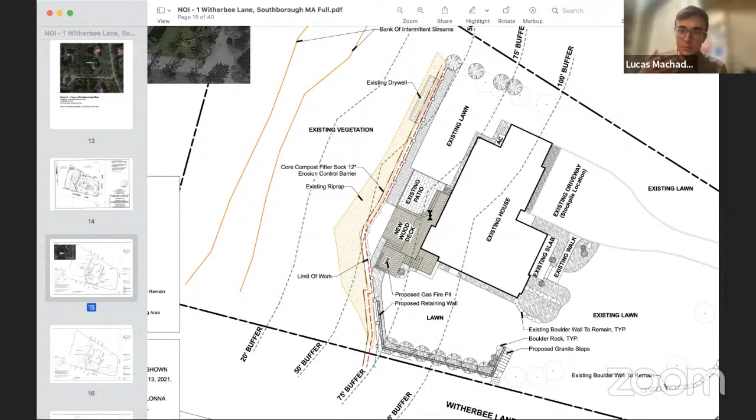Hopefully you can see the proportions okay on the screen here. One thing to note about the fence and the deck: currently, let's look at the demolition plan. You can see this is the current outline of the deck, which is a little ways, maybe 10-15 feet, from the fence. In the new deck design, there's actually going to be a gate. The fence will end here at the deck and start up again at the other corner of the deck, so the deck becomes the new threshold of the fence. In that sense, it's pulling back away from the wetland area, which is nice. So instead of the fence being set off from the deck, it's now all part of it, which gives a little more space over toward that woodland area.

I think the previous developers did a really good job making a very distinct threshold between the wetland resource protected zone and the suburban lawn zone with this existing riprap that you see here. This helps secure the aggressive slope that comes down toward the wetland area, so we're not proposing to do any work beyond that riprap or that slope.

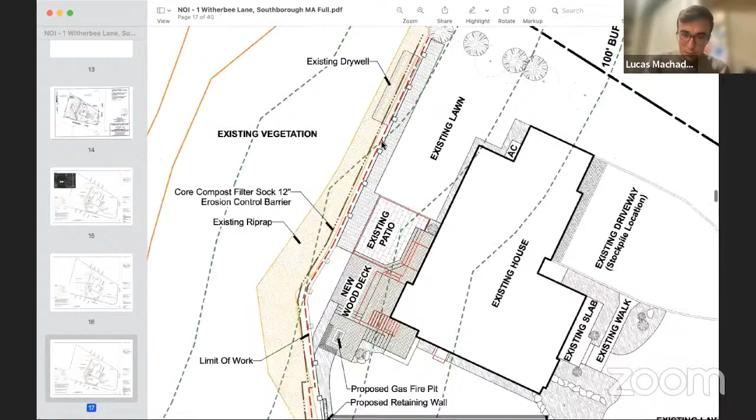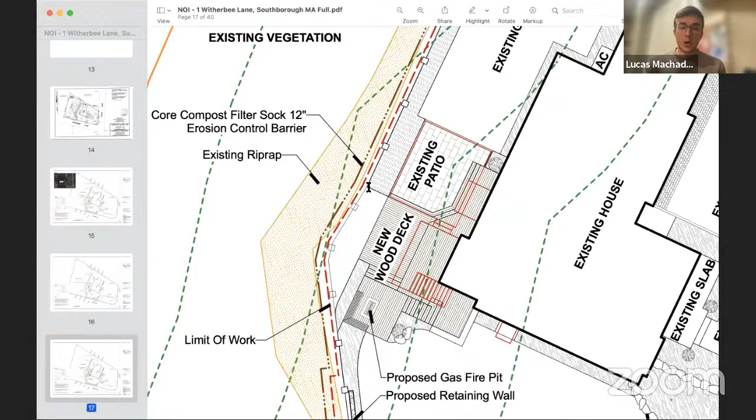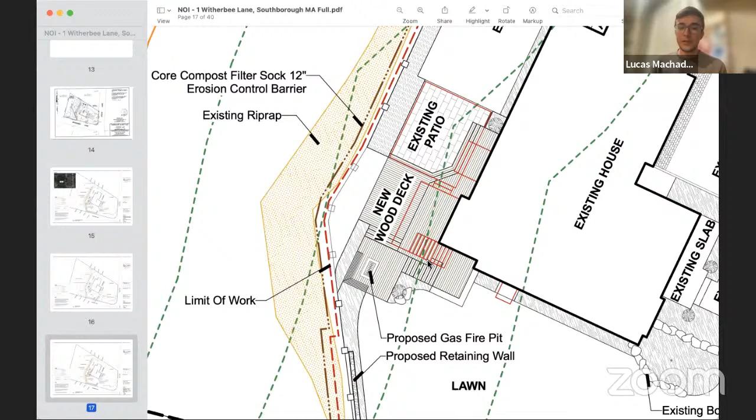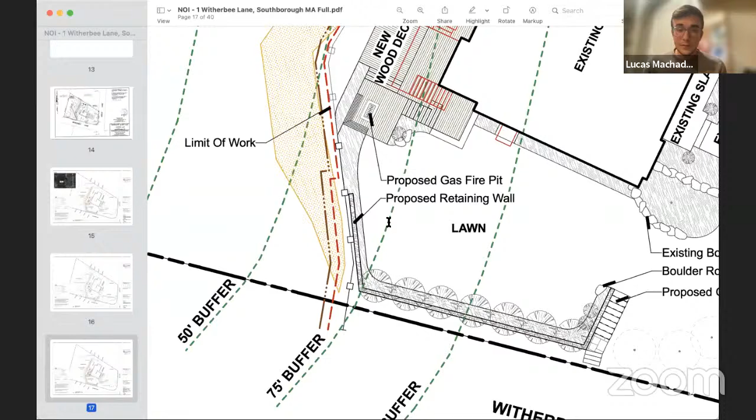That's why there's only about 3 feet to walk past the existing fence here anyway, and that's why we have the limit of work about 3 feet off there. Our erosion control barrier is 3 feet off, and the limit of work is 1 foot off the fence. Most of the work will be done closer to the house because of the nature of the deck, but because we'll be replacing the fence using the existing holes from the previous fence, we put the limit of work at 1 foot off, except down here where the retaining wall gets a little closer to that sloped area, where we're giving a bit more space, although we intend to do most of the work from this side in terms of excavation, footing, and building the actual wall. So we don't anticipate much disturbance on this side, but we did bump it out a little. Other than that, everything is kept from that natural barrier already there with the riprap and the slope.

There is a mitigation component to this, where we've decided to incorporate some native plantings into the proposed landscape beds. That's something we're really excited to do as part of this project, to amp up the naturalization and all the benefits that come with planting native species in their native area.

So I think that pretty much sums up the project, but please let me know if you have any questions. Thank you.

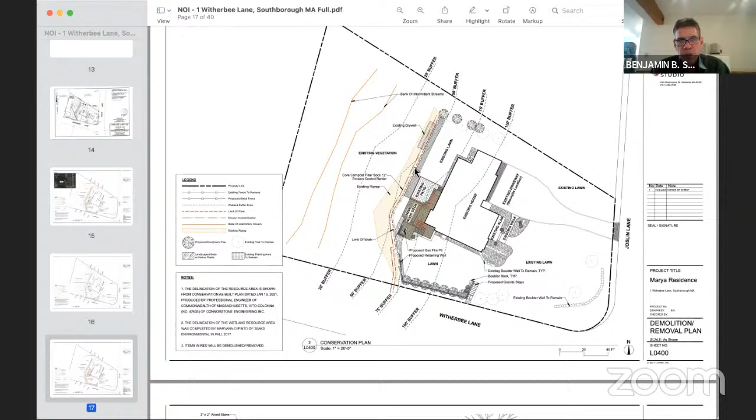So I understand that the previous filing was recent enough that the review done by Lucas Environmental of the resource areas gave Melissa plenty of comfort that it wasn't necessary to go back and reconfirm these delineations. So we don't have a review from Lucas; we have a review from Melissa, which reflects the fact that you worked with her in preparing the filing. It sounds like, Melissa, you don't really have any concerns, that it's all been addressed as part of the filing.

Yep, and I did provide you guys with some pictures too, if you want to take a look at that steep slope. I outlined where the deck would be, because they nicely staked it out and sprayed it for me.

So I just made them a little bit clearer on the photos, so you can tell what he was talking about with that break of the fence. It'll be very clear that you can't encroach back in that spot. I think that's a great idea to have that stopped. Yeah, I had nothing else.

All the yard debris that was there, that me and Matt had noticed last year, has still been removed and nothing further. So happy to report the all clear on that one.

Okay, and the lawn area is not growing as part of this, is that correct? There's no clearing taking place to enlarge the lawn or to install the deck. It's all within previously cleared lawn area. That's correct. Any questions or comments from the commission?

Let's see if there's anyone here tonight from the public who wishes to ask a question or offer a comment. Please use the raise hand function on Zoom and we'll promote you up so that you can do that. Not seeing anyone. All right.

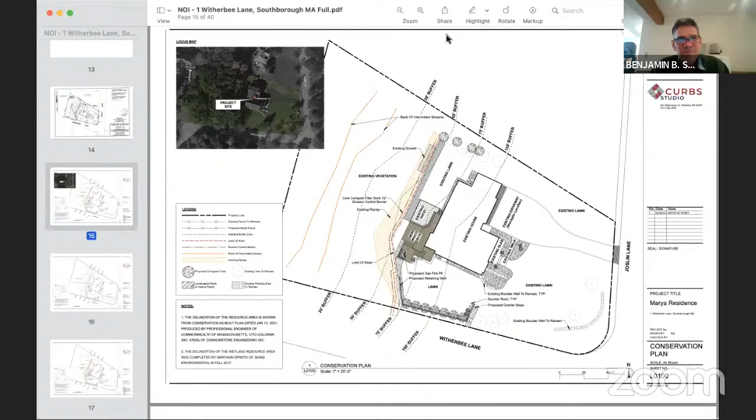All right, no, thank you guys. And I don't know how often you hear this, but I've gone through this process in several towns, and Melissa has made this such a pleasant and smooth experience. I'm so grateful, and hopefully look forward to doing more work with you guys in the future. You have a great operation for this. So thank you for the time again. Thank you, have a good night. And you put together a good application, so it always helps. Appreciate that. All right, bye.

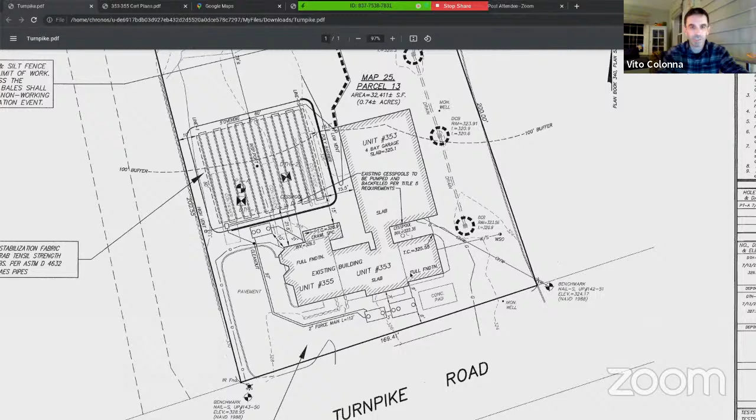So this is the site plan itself. Right now there's a granite shop in there and a fence contractor, and then also a residential unit on that property. They have an existing septic system, which includes a cesspool right in the back here. There's also a second cesspool kind of in the nook of this building right in here. They're both in failure. This one in the back is actually in worse condition.

The top collapsed a couple weeks ago. During certain times of heavy flow, it does leak out onto the surface of the gravel yard back here. So that one's really the urgent one to fix. This one is in failure, but it's not in any urgent need.

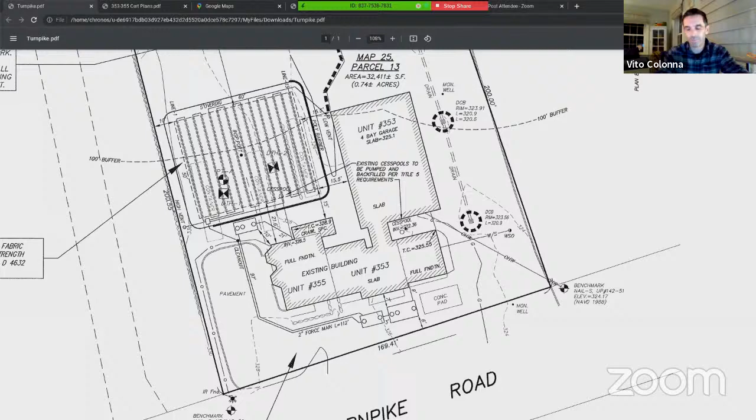There are wetland resources to the back of the site. There is an intermittent stream that runs right through here that leads down to a BVW that eventually goes on to a larger BVW down gradient from us. We weren't able to gain permission to enter the property, so this is shown based on observations from the boundary line. I do have, just so you can see it, luckily the Google truck went into the site.

So the plan was essentially to replace the septic system in the back here. The perc rates were very slow, we had a 60-minute rate, which is the slowest you can use. So the system is very large, and we really didn't have much option to fit it anywhere else on the site. We couldn't fit it up to the side or the front, and we tried to tuck it as far as we could away from the wetlands. So there's really not much option.

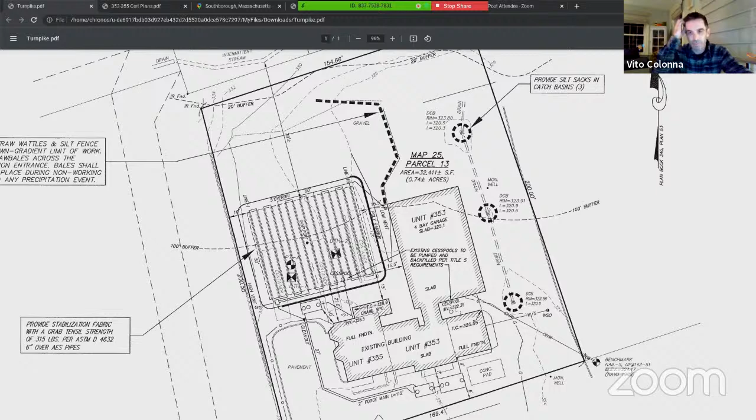We also used a Presby system, which is an alternative system that allows us to shrink the size by 40%. So this is, in my opinion, the best we can do to get it as far away as possible and still provide a compliant septic system for them.

All of the work is basically in this whole back area, which is essentially a gravel storage yard, so all the work would be in that gravel area. We delineated the limit of work and staging area with erosion barriers. This area down here is paved, and then this is the gravel yard, so all construction materials, stockpiles, and equipment would stay up in this upper area, and this would just be the access to get in and out.

The wetlands themselves have really no surface connection. Runoff can't get there because there's a berm between us, and this is actually a higher gradient. The only connection to them would be through the drainage system, so that's why we've put the silt sacks in all those.

And then the outlet, we presume this outlet daylights here, but I could not find it. I think it's buried right now, so that probably should be uncovered at some point. I don't know if it would be part of this project, if it would be allowed, but it should be uncovered. We could not find that outlet, but it does discharge somewhere because these are functioning, whether it just seeps through the ground. As far as that, I think it's just buried at the end.

As part of this too, we do have a certificate of compliance for an old order from the 80s, and that would be addressed later on. But if there's anything from that old order, we could always roll it into this current project, such as maintaining these. If there's a hood missing on a couple of these, we could add that in potentially as conditions for part of that prior certificate request.

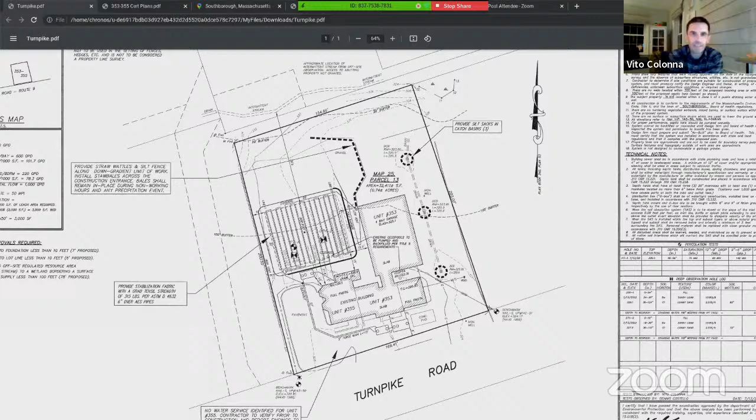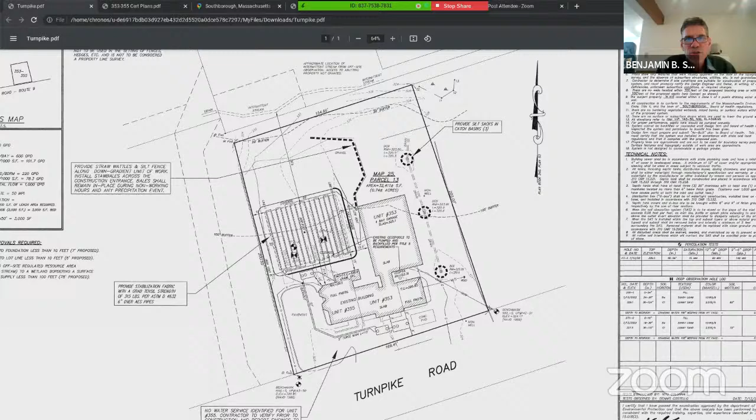Okay, I guess I could hand it back over and take questions to see if you address anything. Thank you. First, Joe, I see you put together a review letter. Would you mind just going quickly through your comments?

Sure, so I went out and took a look at the delineation, the stream. As far as the delineation, I didn't have any significant issues with it. I thought actually two of the flags were a little bit high, I thought you could connect from flag 10 right to flag 13, and that would be an accurate delineation.

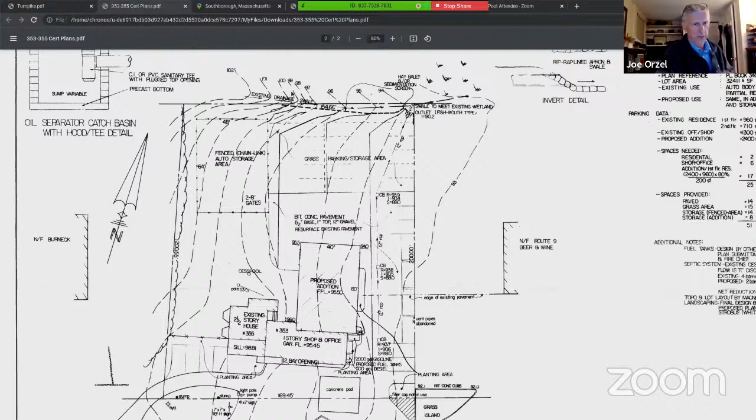I did have a question on the stream location. It appears accurate on the plan as to where the stream is currently located. I know I'm looking at some of the previous plans, which show the stream more or less along the property line. I note that there is a soil berm existing now at the back of the property, and as shown on the current plan, the stream channel is set back from the property line. So I don't know, it appears that at some point in the past that stream channel may have been realigned. I did also note that the culvert, the outlet from the stormwater, is buried. I couldn't find it either.

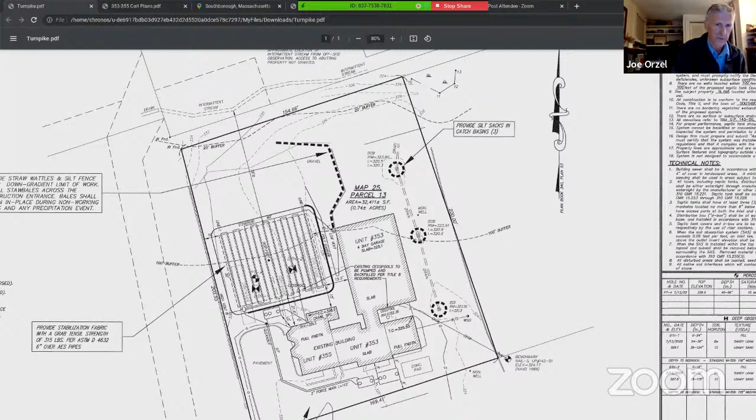The buffers are not indicated in colors as described under the bylaws. They should be for the site plan. It also wasn't clear which erosion control barrier was being proposed.

I recommend that if there's going to be a soil stockpile, the location be indicated on the plan, and also where the equipment that is currently stored in that area is going to be moved to while the work is being done. And that was about it.

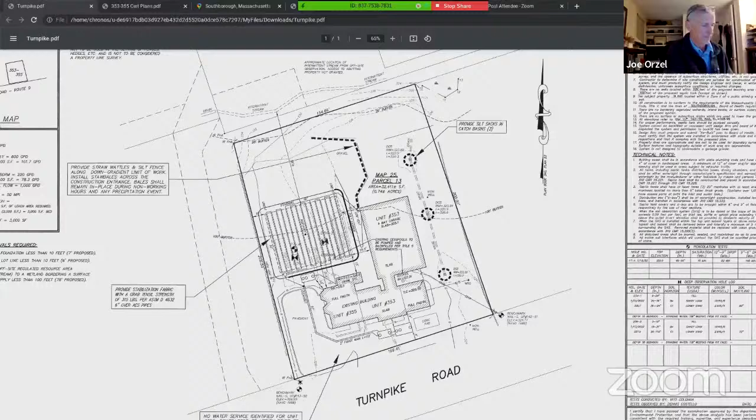Okay, do you want to just run through a couple of them? Please. Okay, I was looking at the old plan.

I think it might have been a drafting error on this, just because this is actually a berm right here, and this is the old original plan from '85. So obviously the swale wouldn't run down the crest of this berm right there. I think someone saw it and read the contours opposite.

Good point, like it was going uphill. Yeah, so I think the swale is actually meant to go right on the toe of slope up in here. So this berm actually, the topo on this plan matches pretty close to what we have now. I think it might have just been a drafting error on that, but I can't verify anything anyway.

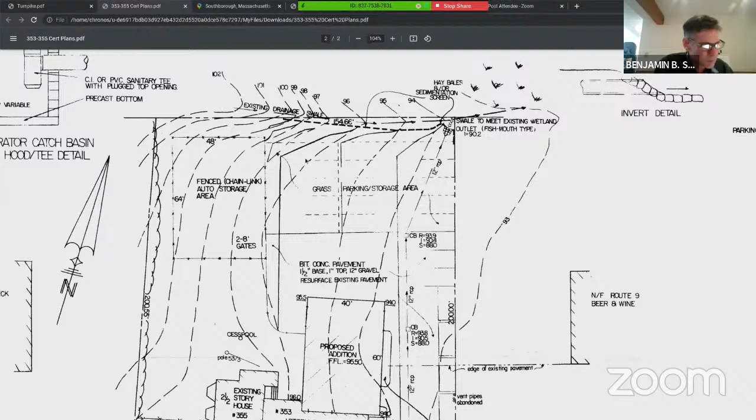Back in the 80s. But okay, and then on a lot of some of the administrative items, just last minute, I sent some over to Melissa. I'm not sure if you even got them. I just updated some of the forms. Yeah, I got those. Okay, I know it was last minute.

Sorry, I was just kind of going through this before the meeting, and I noticed that we didn't ever address those. So we sent over the updated forms.

And then, yeah, we would use straw wattles and silt fence, except for this section where the trucks are going to come through. They could designate a spot, and they'd have to use straw bales for that, so they could move them as the trucks come in and out. And that way at night they could put the straw bales back, but during any rain events.

And as far as the equipment that's out there now, the owner's been talking with the tenants on what they want to do and how they can move that equipment around. Some of it may have to get taken off site.

Other than that, they have a lot of dry goods, fence materials and all that. It'll all have to get moved temporarily to allow this work to go on, because all our soil stockpiles would be up in here, and the construction equipment would all be contained in this area. So all their existing machinery, fence materials would all have to get relocated down to this portion of the site, or potentially up in here.

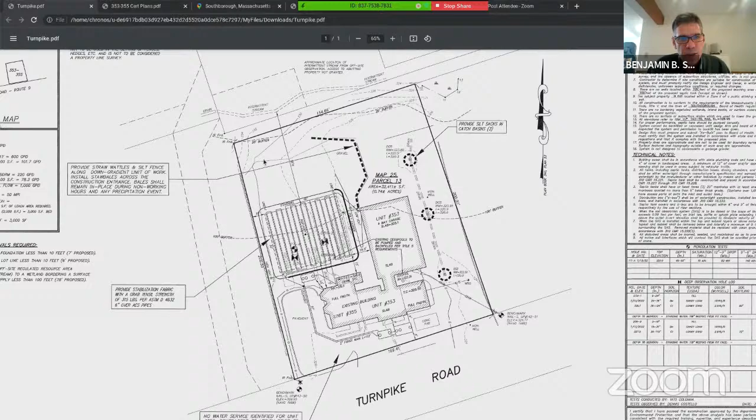Okay, so in terms of conditions, Melissa, you probably kept better track than I, but for stockpile locations, I think we could give a setback from the rear property line as a sort of proxy for the 20-foot no-touch zone. If everything was kept back no closer than 10 feet from the rear property line, we'd be out of the no-touch zone. I think that gives plenty of room to work and handle stockpiled materials.

Yep, definitely. And I don't know that we need to condition the removal of equipment, just maybe the same restriction on equipment as it's shuffled around, that it not be stored any closer than 10 feet or so to the rear property line. Does that make sense to everybody?

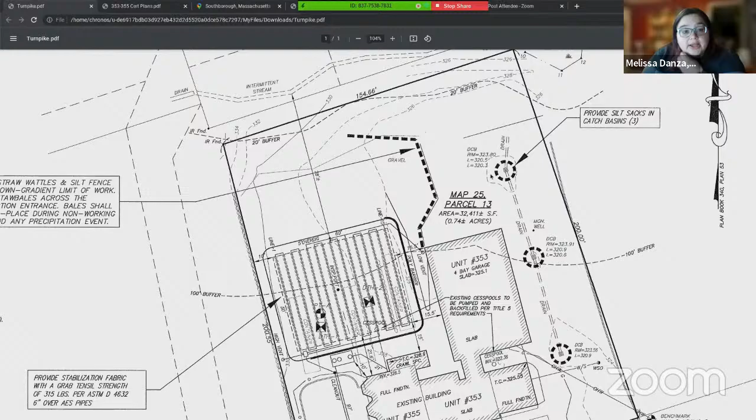I think, Melissa, was there anything else? Did I miss something? Do you want anything about the stormwater catch basins and outlets? Oh, yes, thank you, I knew there was something. So the outlet will be located and, if necessary, the pipe cleaned.

In consultation with our agent, so we don't get down with our jet truck and blast a bunch of sediment down into the swale. Okay, and then we should also clean the catch basins and put hoods on if needed, just to add that. Yep.

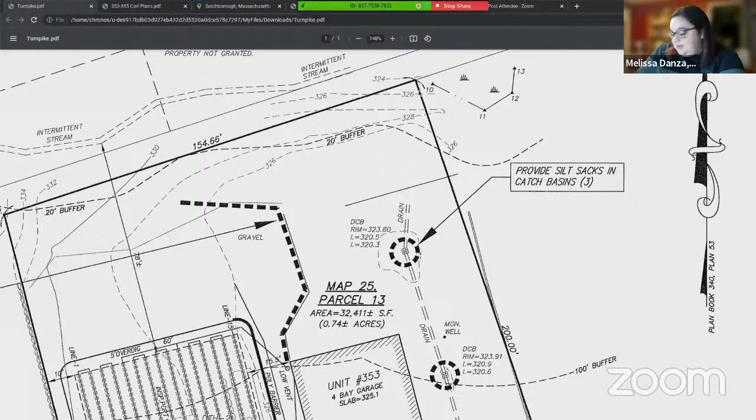Thanks for signing up for that. Yeah, probably some armor around the outlet, even up the bank, just to keep it obvious too. Yeah, maybe once it's located we could have a sketch or plan of what needs to be done, something like that. Yep, once you locate it, just give me a call and we'll go from there.

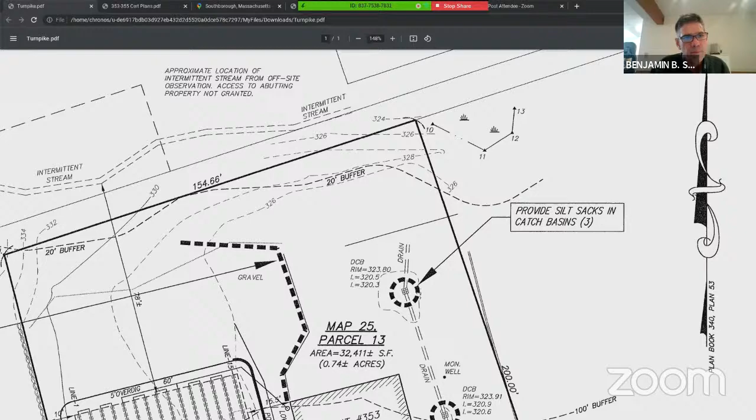Great. I think that captures everything.

I agree. Okay, and I'll just make a finding about... I don't know if you guys want to do the COC tonight, or kind of do what we've been doing when we find these historical ones that need a little bit of a fix, maybe waiting until the outlet is cleared and then coming back to it at that point to close out that permit. In an ideal world we'd either get it all wrapped up first or go through methodically and wrap things into this current filing, but this is a sort of dire situation, so I think that's a good plan.

We can come back to it after the outlet has been taken care of and those structures have been looked at for hoods and so forth and cleaned. Does that sound like a plan to everybody? Okay, yeah, that sounds good.

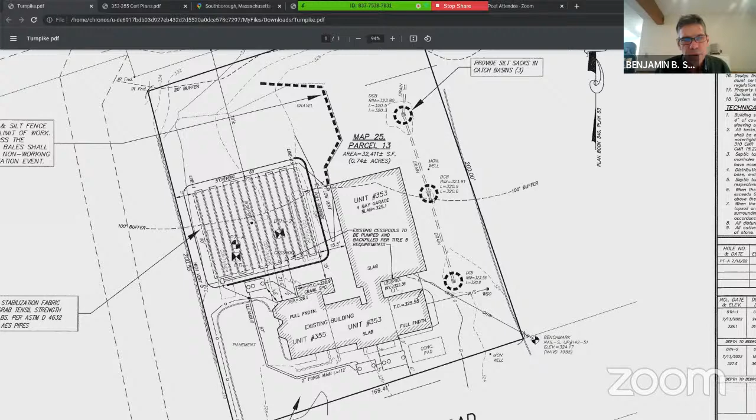So with that being said, the next step is a motion to close the public hearing. So moved. Thank you. Is there a second? Second. Thank you. Farrington, yes. Zulik, yes. Gregory, yes. Smith, yes.

Vito, well first, Melissa, do you have draft conditions put together? Okay, and we can wrap in our newly added ones. Yep, and we'll get that voted on at the end of tonight's meeting, so you can have an order of conditions in hand tomorrow. Okay, that's great, that's perfect.

We already sent it out to bid a while back, so I think he's ready to go. Oh fantastic, yeah, that was really quite a picture of that. Yeah, all of a sudden it got worse, so. Well great, all right, thanks a lot. I don't have to stick around for the certificate later, right? No, all right, great. Have a good night. All right, great, thank you. Good night.

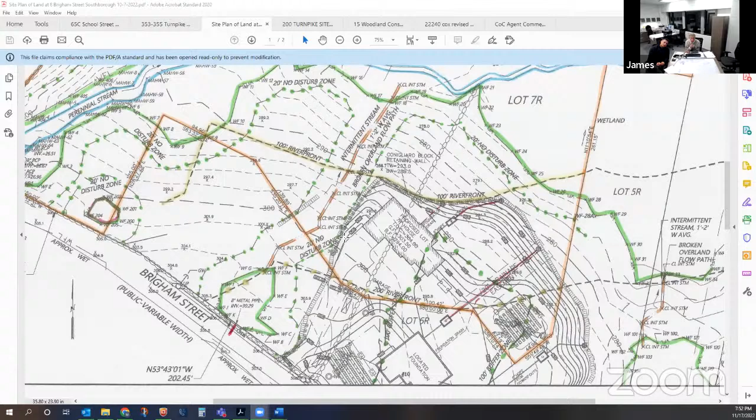We appreciate that. I have a couple of quick questions. First, the row of boulders for the riverfront area—it looks like, just the scale of the plan, I was squinting at it—do those boulders continue down along the 20-foot no disturb also? Correct, on the left or west side of the proposed house, they continue along the edge where the proposed work would get right up to the edge of the 20-foot no disturb. There's boulders there as well.

Okay, and the proposed lawn area is obviously going to be within that boulder area, but then on the rest of the site, it's going to be along where we see the erosion control barrier, sort of at the limit of work. Is that also the edge of lawn proposed on the right-hand side of the lot?

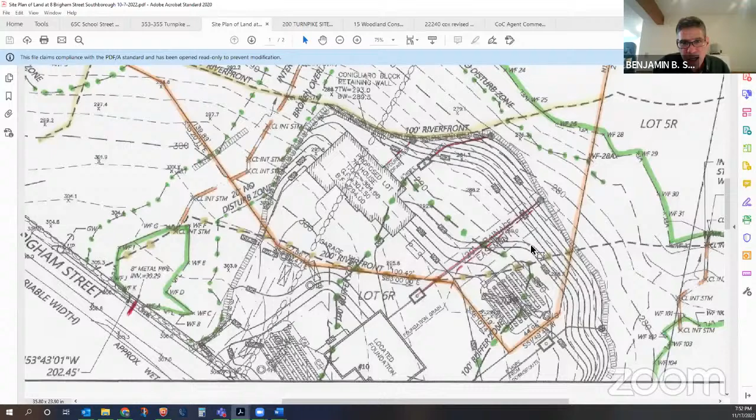No, it is not. Was that previously permitted under that notice? It was actually a slightly different location. It's being moved because it was going to go out to roughly just behind where the septic system for this lot is proposed.

Only it can't get there now because it would go right through this septic system. So we're proposing to move that location for that adjacent lot's foundation drain and discharge from the infiltration. So that will have to be done as an administrative change to the other order. We can't, I don't believe we can do that through this notice of intent, make that change to another. Is that correct?

Yes, although if you do it as an administrative update, you can just vote it outside of the public hearing. If you get what I'm saying, we could still make a motion to that effect, it just wouldn't be with this approval. Right, so it doesn't require public notice and all of that.

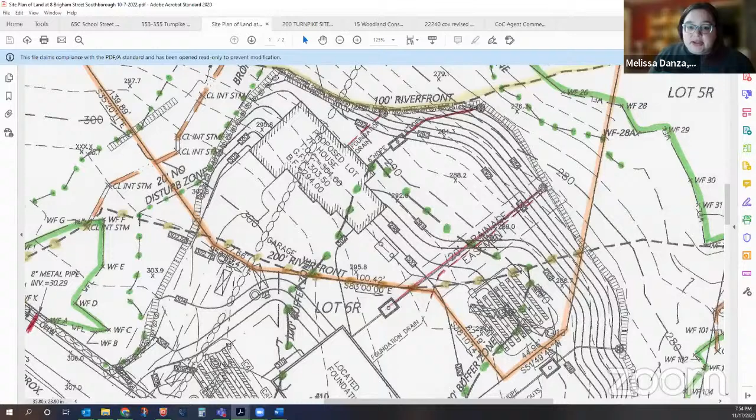Correct. Does it need to appear on an agenda? Probably should. If it's unexpected and it's something discussed as part of, not in direct relation with this, but something that came out of this conversation, I think you guys are more within your right to make that motion.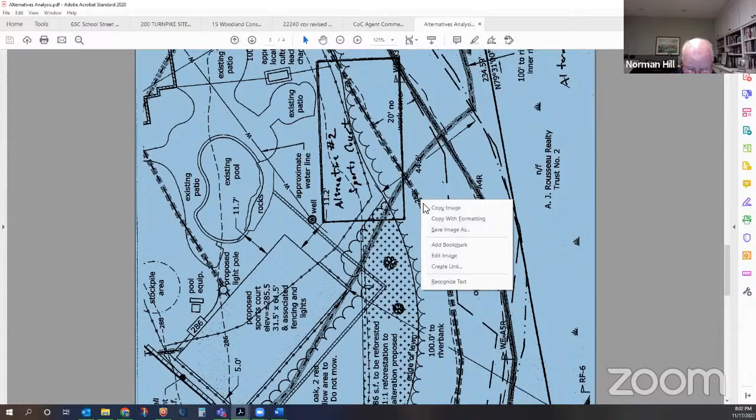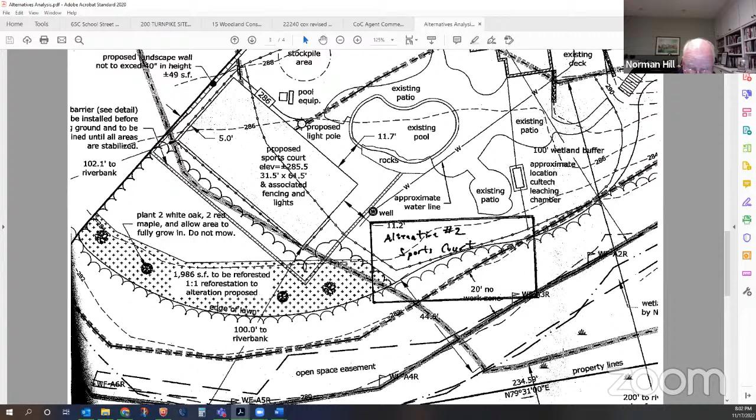Now I'd like to show you alternative number two. I slid the sports court to the right about 100 feet. I don't believe this is a good idea because it would require a large area of trees to be cut down, and a small section of the court would actually be in what is now flagged as wetlands. Also, a portion of the court would be located in the 20-foot no-work zone, which would require us to design a wetland replication area, and more trees would have to come down. So we don't think alternative number two is a good idea.

So then I slid the sports court another 100 feet to the right—alternative number three. I don't think this is a good idea either, because it would be built on a steeper slope, requiring a retaining wall on the lower and higher ends. Also, a portion of the court would be in the 20-foot no-work zone, a large area of trees would have to be cut down, and this alternative would also require a waiver from the 20-foot no-work zone.

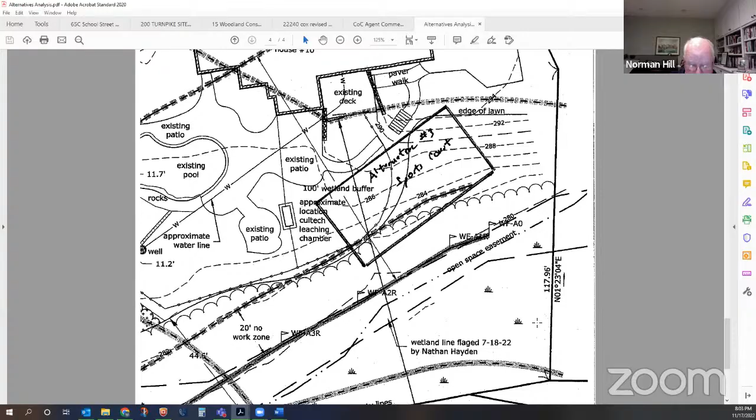So I hope you would agree that alternative number one is the most attractive alternative, and I'd be happy to answer any questions you may have.

Okay, questions, comments, or concerns from the commission?

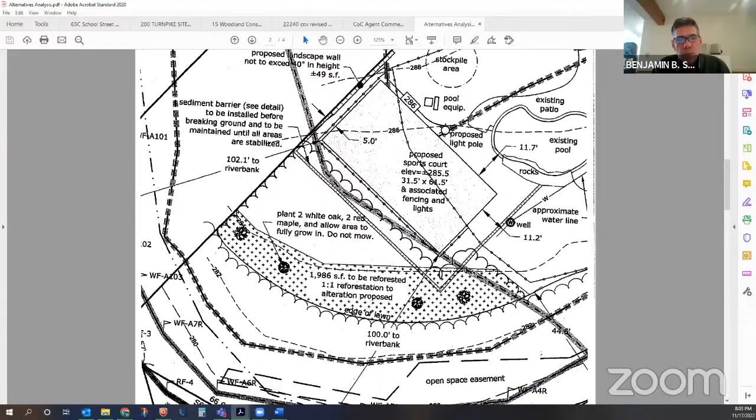Okay, this is what we needed, as I said last time, to dot the final I and cross the final T. This is a matter of consistency and fairness. We have to ask for this from every applicant that comes up against the Rivers Protection Act. So we thank you for putting this together. I think this was the final piece of the puzzle we need to get an order issued here.

Do we have anything else outstanding, Melissa, that you can think of? Nope, that was the last piece. So with that, step one is we close the public hearing, and step two at the end of our meeting this evening, assuming Melissa has put together some draft conditions, we'd vote on the conditions, and you could have an order in your hands tomorrow morning.

Thank you very much. So, first, is there a motion to close the public hearing? So moved. And is there a second? Go ahead, Kevin.

Thank you, everybody. Stay well. Stay well. Thank you. Second.

Barrington, yes. Zulik, yes. Gregory, yes. Smith, yes. Okay, and as I say, the conditions, we put those off to the very end of the meeting so that everyone can get out of here and we can just take care of the administrative stuff.

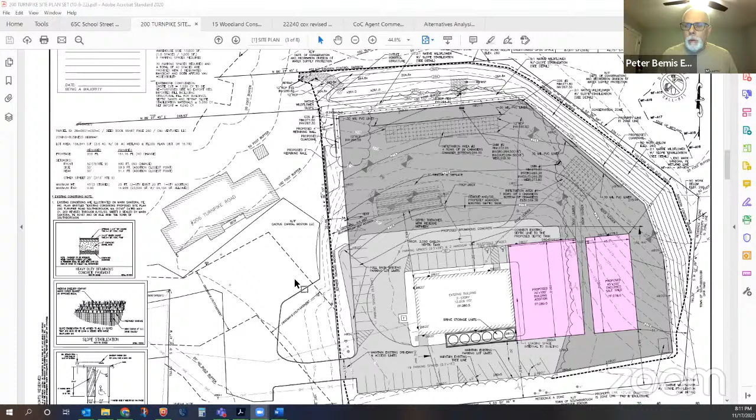We've retained that. We did locate a few more existing trees that was requested by the planning board. And we also changed our lighting formula a bit, which I know has really nothing to do with you folks, but we did make that change, and that's in the plan as well.

The other sheets had details on them. There are details for the rain garden specifically to say what planting materials will go there. It's plants that we've used before, so I'm fairly confident that will thrive.

There's a separate landscape plan, and there was a separate SWPPP, because we are asking not only for the order of conditions from you, but we're also asking for an SMP. So that would be it.

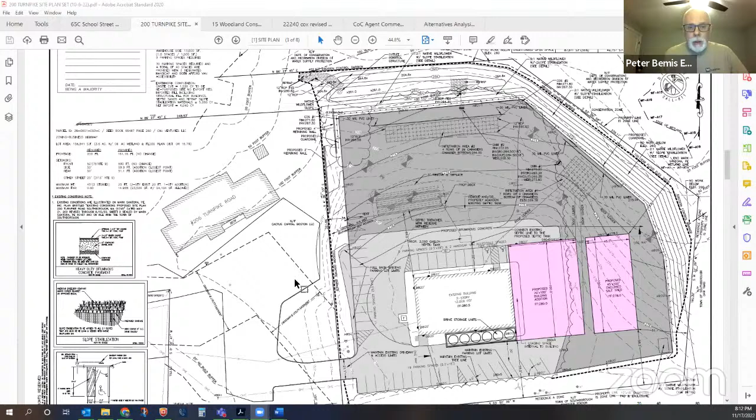If there's any questions, I'd be happy to answer them, because I'd clearly like to keep this addressed in advance of the next meeting, since I'm hopeful that we can get closer to closure at the next meeting. Thank you.

Sorry, forgot I muted. Thank you very much.

Melissa, the review status with Fuss and O'Neill—they reviewed the previous iteration of the design. Are they taking a look at this? It's in the works, so they have been provided with the updated plans, but we have not yet received the updated review.

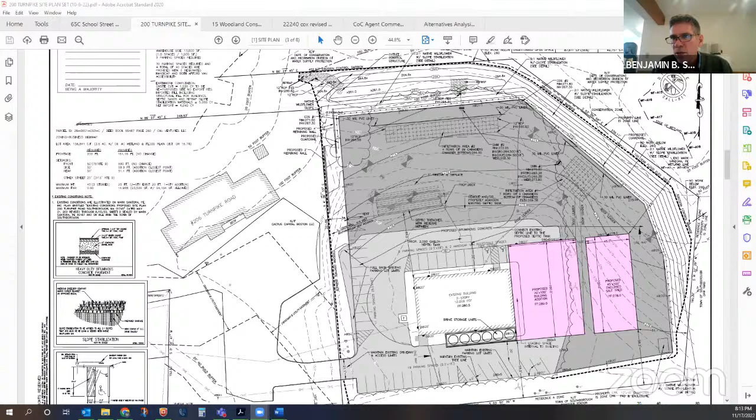Myself, I don't have any questions or comments. Anybody on the commission? Questions, comments, concerns that you'd like to raise? Okay, not hearing any. If there's anybody in the public who wishes to ask a question or make a comment, please use the raise hand function in Zoom and we'll promote you up. It looks like we're down to just a couple of attendees now.

So I guess with that, we're just waiting on the final okay from Fuss and O'Neill, and I suspect we'll be good to go. I would imagine that we can wrap this up at our next hearing.

Yeah, Peter, do you still plan to respond to the latest comments from Joe? I think that some of those items might be still outstanding as well. Yeah, I'll go through that. Probably the most important one, Joe, was the fact that anything beyond the lot limits—I wasn't looking for resource delineation on that. It was really just those activities.

I know that you had picked up a few finer points in what the Santora submission had. I talked to Melissa about that and said I am fine with not getting a delineation locked down for that, because it's not important. What's important is what we're proposing on this project. I'm not trying to do anything past that. So I'll go back and look through it again, though. Through the chair.

Those lines will affect the buffer zone on the project site, though. So that was why that was brought up. Yeah, I don't think it was going to. My limit of work, though, doesn't change, or the manner in which I'm doing something doesn't change to affect that. But let me look at it. I'll better address it with you separately, and I apologize for not including that at this time. I'll do it. Thank you.

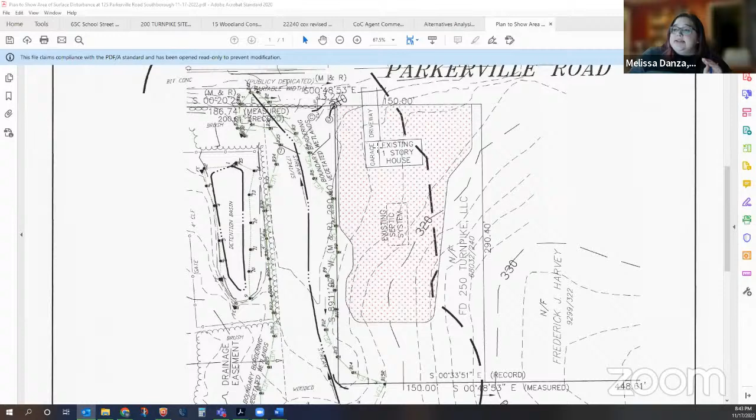So they stated that they are under the 50% threshold for a stormwater management permit, so they wouldn't necessarily need to file. This is an existing house, existing septic, etc. I think it had been abandoned for a while and just got a little overgrown. But the one issue that stood out quickly is that this green line is the limit of the wetland boundary, and they are very close to this edge, probably within 5 feet at least. They stated that the alteration is just barely under half the area of the lot. The area of the lot is exactly 1 acre.

Surface altered was over 21,200 square feet, or 48.6% of it. They apologized that it even came this close. They were supervising improvement of the yard, which had been completely neglected for several years. This included cutting dead trees, removing patchy moss over some areas of the yard, and removing brush that had established roots down in the septic system leaching area. So it's my opinion that at this point they would need to file an after-the-fact application, most likely a notice of intent due to the proximity, not necessarily because of the extent of work, but I don't know how extensive it was on this side either. I really just did a drive-by from the street and noticed the amount of disturbance.

They said they also seeded with a fast-growing mix. I'm not sure the specifics, but I'm assuming that went on today because when I drove by yesterday it was still bare dirt, so that's probably a hydro seed. I wanted to get your thoughts initially. They are being very responsive, but before I responded, I wanted to get your confirmation or other thoughts about next steps in terms of a notice of intent or other wetland application.

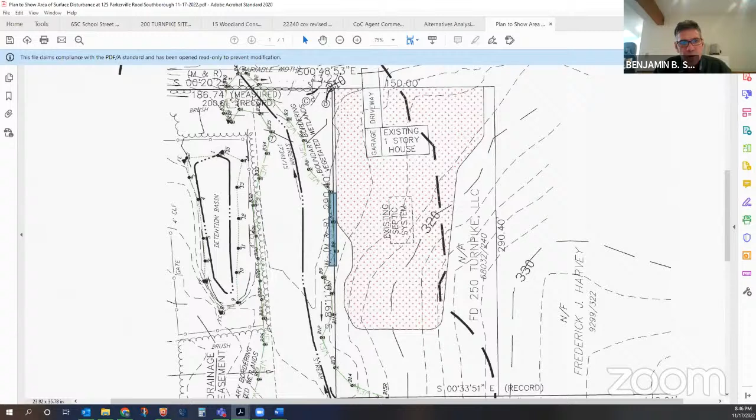And if they were out there with a bulldozer or something, scraping up the root systems for brush or whatever within the 20-foot no-touch zone, I think we need an NOI for a restoration plan. I'll get some further clarification on the amount and size of trees and brush removed, and more approximate locations, but we'll let them know some sort of filing is needed. What comes out of that initial report and maybe a more detailed survey with locations mapped can give us a better understanding of NOI versus RDA. Does that sound like a plan to everybody?

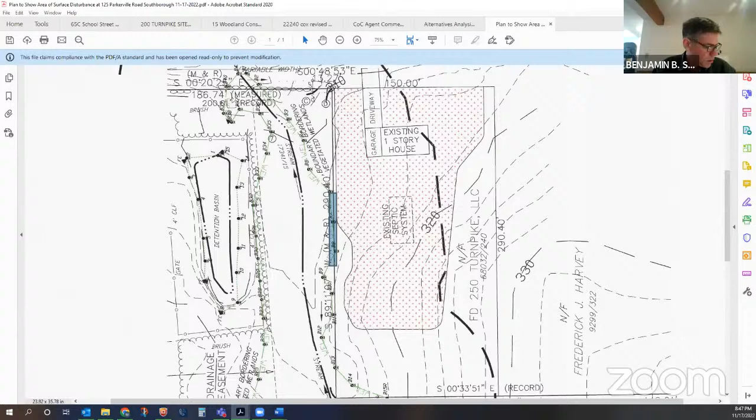Yeah, okay, great. Ross, I'm going to stop sharing. You good? Okay.

Let's see, any other active sites, interesting stuff going on? No. Oh, sorry for the alarm. We do not need a special meeting for that one application. They finally did sign the waiver after stating they wouldn't, so thankfully that helped. It was a bit of a scurry because of the holidays and the timing of the newspaper, so we needed to move as fast as we could, but they finally understood it was just a one-day short, so they signed the waiver, and I'm very thankful for that.

Oh, great. Yeah, I was curious if it was - I'm surprised it doesn't happen with us occasionally, just with the spacing of our meetings. We're so close to the deadline that folks try to game the system for a presumptive approval, but it hasn't happened, which is good. Don't jinx it.

Let's see. Actually, under other business, something Elizabeth brought up first - do you go by Elizabeth or Liz? Liz, okay, thank you. I thought so but wasn't sure. You were asking who the members of the commission were, and the fact is we have 2 empty seats still, and have for a while. So all I was going to say is if anybody knows anyone who may have the slightest bit of interest in joining us every 3 weeks, please encourage them to get down to town hall and fill out an interest form. It would be great, because we're just surfing along very close to a quorum as it is, and it'd be great to get a full panel again, because right now it's always kind of a challenge. Just thought I'd throw that out there. I'm looking around too.